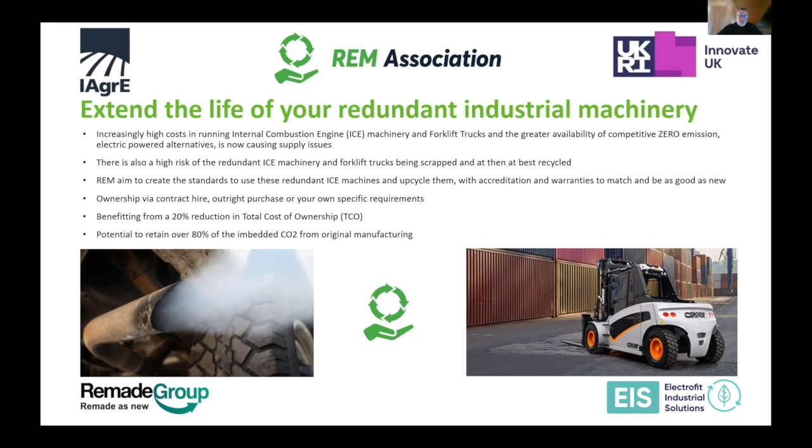So with the rising costs and increasing burden of higher taxation, forklift trucks and industrial machinery costs are increasing disproportionately to companies' profits, and in many cases increase of over 200% just in the last 18 months.

The lowering cost of lithium-ion electric alternatives and their inherent reduction in running costs has greatly increased the demand of these electric alternatives. So the increased demand, coupled with global supply chain issues, has pushed lead times of up to 90 weeks, resulting in foreign exchange rate increases and increased risk of management of the finance contracts that sit alongside much of this product.

The reduced demand for ICE machinery would also cause an influx of redundant used equipment. So with the original manufacturing energy, if this is wasted with the machinery being scrapped and by them not being reused, we believe that's a complete waste, where we can help retain 80% of that original material and save that energy, reuse it, and improve the commercial viability of this type of vehicle to asset management companies, AMCs, and also to their customers.

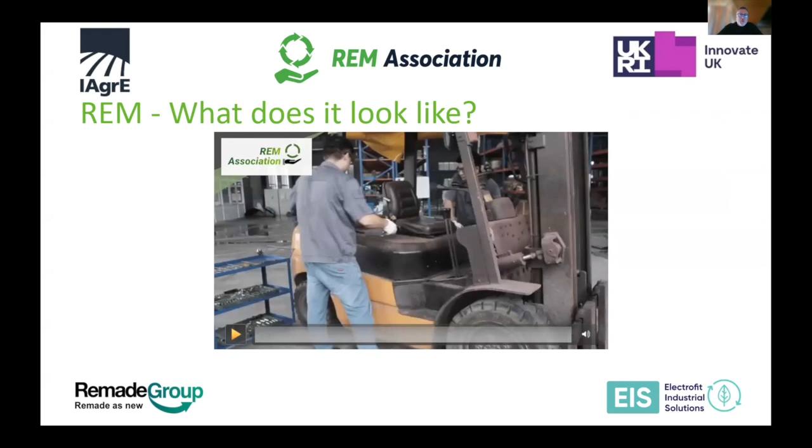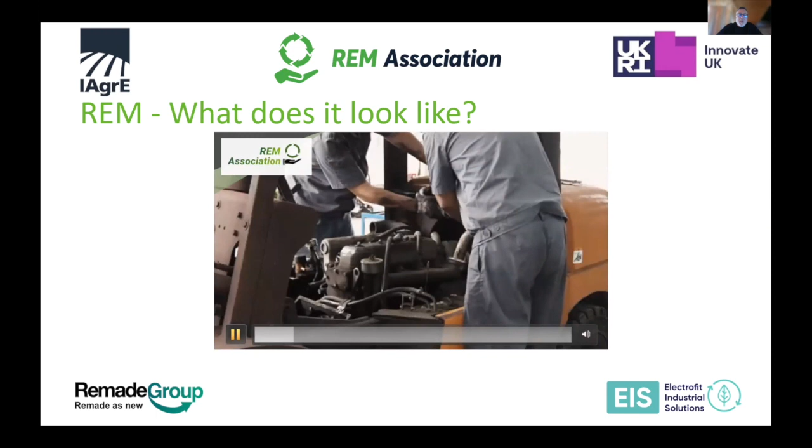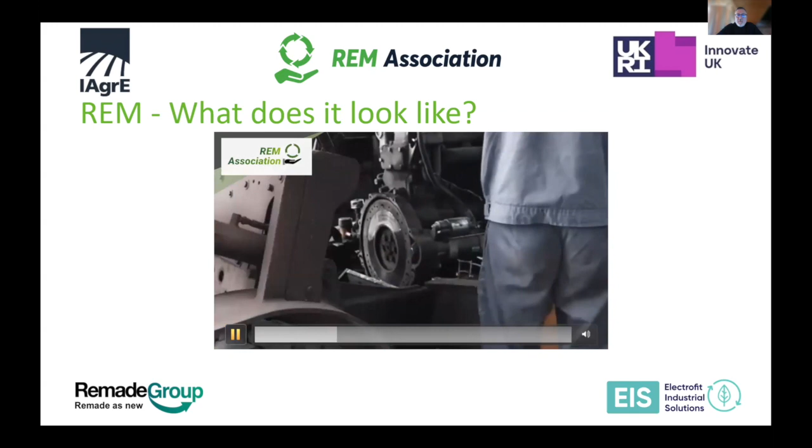So what does a REM conversion look like? This is a short video showing an engine forklift truck - a standard 2.5-3 ton counterbalance forklift truck that one manufacturer, back around 2017, decided to look at as the basis for a new forklift truck. They simply took the engine out, along with all the additional componentry required to run an engine in a forklift truck.

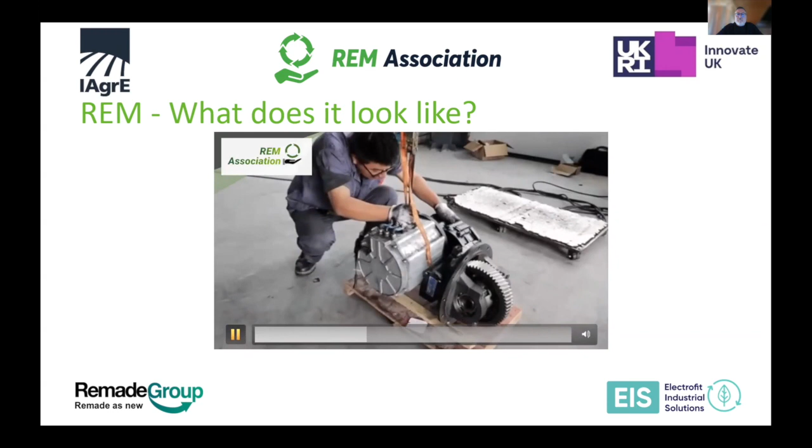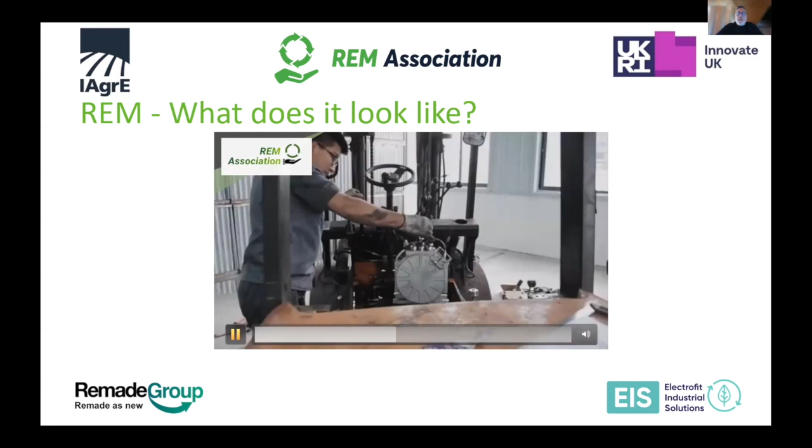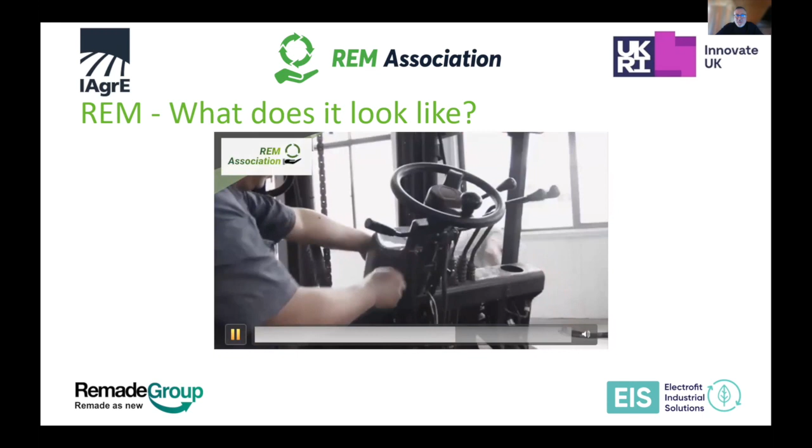This is the electric transmission and motor, put in place of the original transmission. With the motor being much denser and smaller, it's able to be mounted very low down in the chassis. In a forklift truck, this is really positive, because we want a low center of gravity - forklift trucks are inherently unstable, as some of you may have found out, lifting loads at height and trying to turn on gradients.

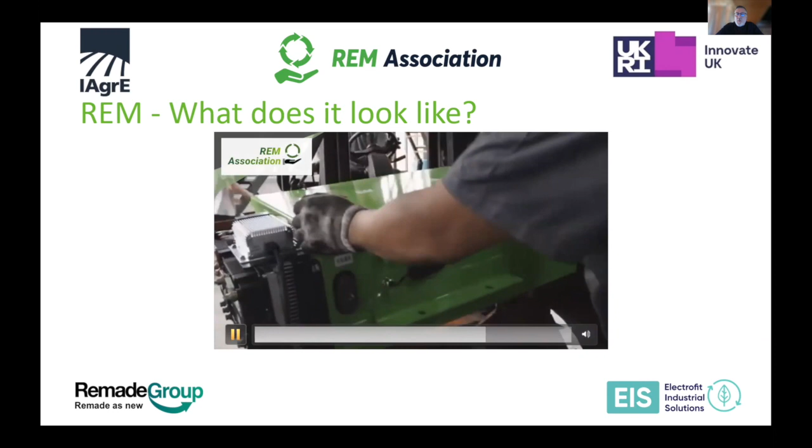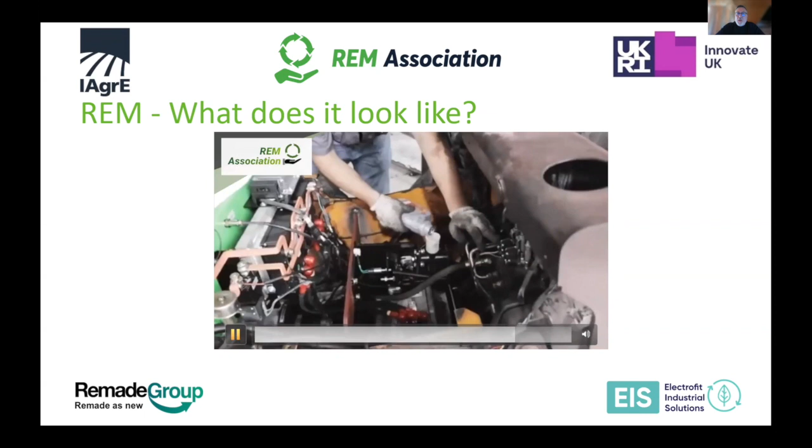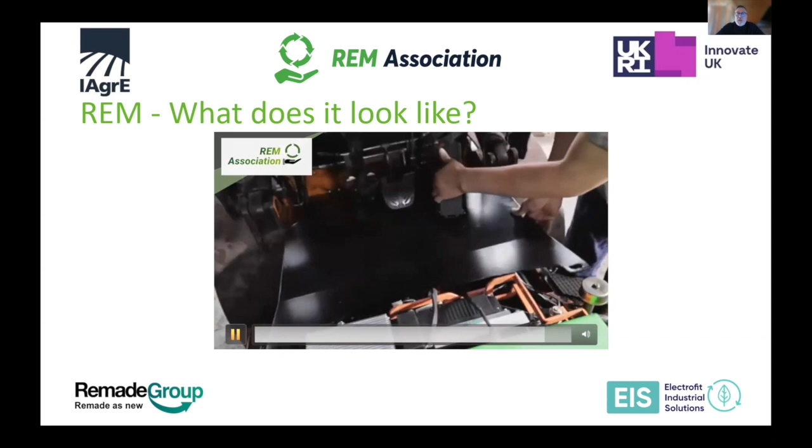Then the battery - a small compact lithium-ion battery pack with the battery management system installed on the side. Everything's very accessible, but also very compact, which means we can keep the center of gravity and load centers exactly where we want them. And this is the process finished, going away for testing on the load ramp.

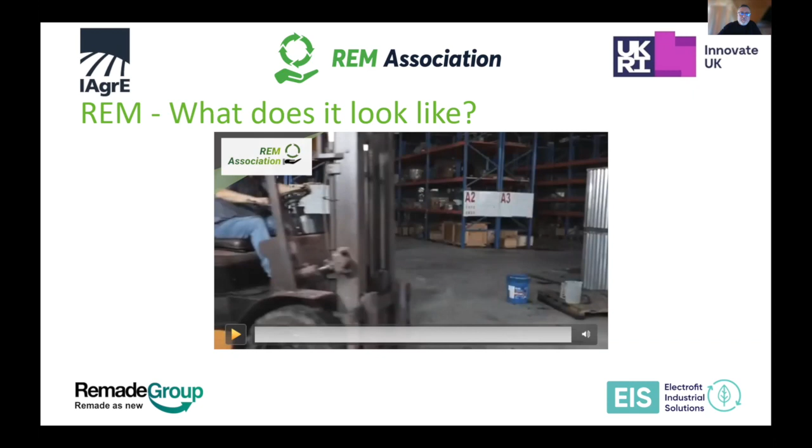So that was a diesel machine converted into electric - not remanufactured to an as new standard, but it gives you an idea of the feasibility and ease with which it could be done.

Now we know this is happening in several other industries. I'm going to talk about a purpose-built electric ferry called Ellen, which has been in operation since 2019. It was purpose-built, operating between two Danish islands, and it saves 2,520 tonnes of CO2 emissions per year. It operates at 85% efficiency from grid to propeller, and they believe the return on investment will be anywhere between 4 to 8 years. With a REM equivalent, it would be even faster.

Now, the 2,500 tonnes of emissions saved is what they're actually saving using renewable energy. If they had to use the Danish grid to power it instead, it would still save over 2,000 tonnes of emissions per year.

One of the big questions with electric vehicles versus IC is the cost of producing the battery, which is so high in a high-cost environment. They've done a study on this, and it was 215 to 430 tonnes of CO2 emissions in producing the batteries, estimated to be about 3 months of the very best modern diesel ferry. So the CO2 emission payback is 3 months, which is equivalent really to cars.

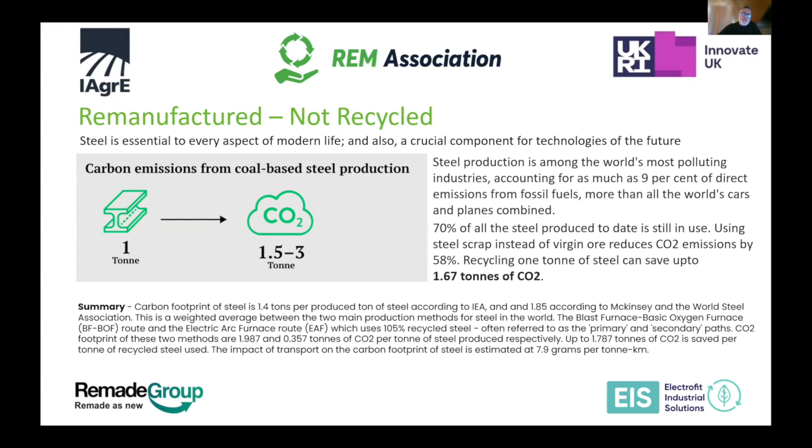And onto the tools. This is being created by Brighton University. I've got another short video to show you which Brighton University have been kind enough to create for us. So I'm going to play that for you now, just to explain what the cost calculator is and what it's hoping to bring.

The three scenarios are: buying a new electric vehicle, utilizing the trade-in value of their existing owned one, or if their current lease is at an end. The second scenario is buying out or renewing their existing lease, having the vehicle remanufactured to a like or better than new state, and continuing on, thus still having an internal combustion engine. And the third scenario is remanufacturing and converting their current internal combustion engine vehicle into an electric vehicle.

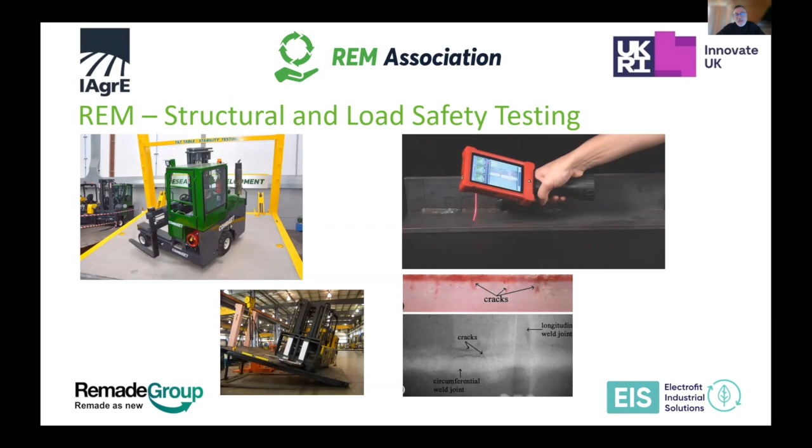And that goes the same for the EMC, the electromagnetic compatibility testing. But one thing what we can do above and beyond a manufacturer from new, is that we can actually do pre-compliance testing. So we can actually look at individual components that are going onto a new vehicle and then help reduce the risk of failure when the full vehicle is tested, which can be an expensive process. So it helps reduce some of that risk.

And another thing, as part of the association standards, will be a recognised either kite mark or ISO standard that will give assurance to anybody that's buying a REM vehicle that it does meet that standard, so that it's remanufactured and returned to as good or better than new, with the equivalent or better than warranties than the new product.

And also a confirmation that this is actually helping to build a more sustainable procurement future, which will become more and more of an incentive, providing the prices are where they need to be.

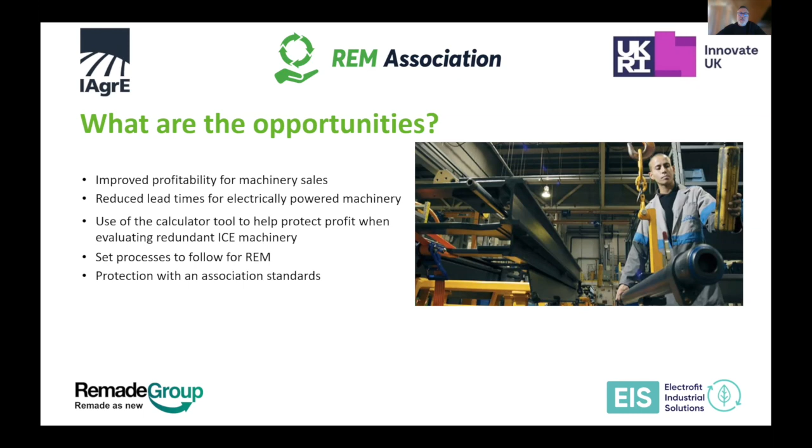And then there's protection with the association standards. So we're looking to take away some deliverables from this, which is a minimum viable product of a prototype web-based cost calculation tool, which you'll get to see when you watch the video back, which is dedicated to REM vehicles and machinery, a framework for recertification for REM vehicles and also continued development, and a market survey report completed by industry, vehicle and machinery operators.

And 2 workshops with an online one, which we hope this to form part of the first one, to gain feedback from participants.

And our aspirations are to facilitate the upcycling of existing ICE industrial machinery, and enable customers to make better decisions when purchasing replacement industrial machinery, and create a safe framework in which companies and AMCs can operate REM industrial machinery.

And supply a simple online calculation tool for fleet buyers and AMCs to evaluate REM, and provide the support and the structure and consultancy for fleet buyers and AMCs to make the right decision when disposing of redundant ICE machinery.